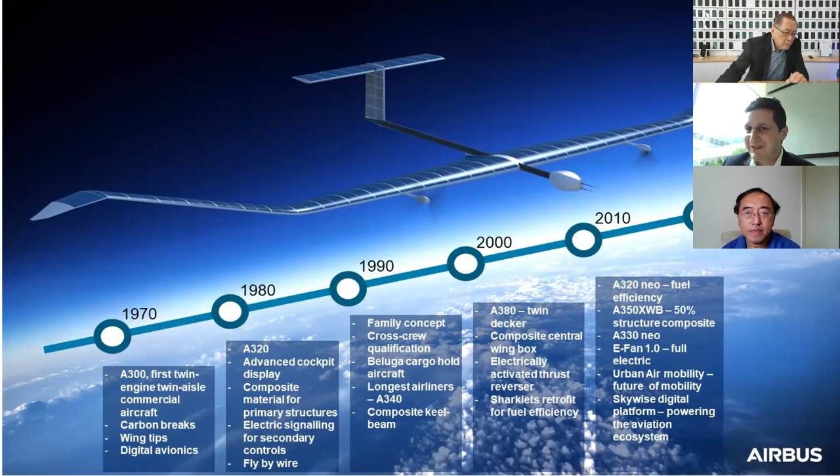Now, what I'm describing here is something that we have ourselves. We were in the driving seat, if you want. We develop technology and make sure that it goes on the plane slowly but surely, step by step. The world is accelerating. Everybody is talking about digital, we are more and more connected, and what was true before is less and less true. We are not always in the driving seat anymore, and sometimes we need to look outside of the aerospace ecosystem to understand where the new promising technologies are.

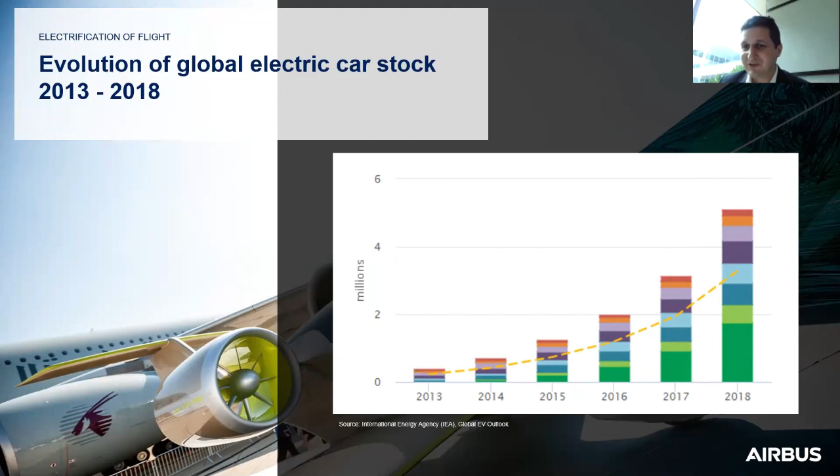For example, if you look at the evolution of the electrical car stock, this is exponential, right? This tells us that the technology at some point will reach a level of maturity and a cost per unit of energy stored that is going to be useful for aerospace. Similarly, and maybe even more important for the topic of today, I'm talking about hydrogen, the growth of renewable energy started from something that was barely noticeable 10, 20 years ago, and now this is exponential. I guess the growth of renewable electricity is an exponential thing.

And this is actually key when you're trying to do a zero emission type of aircraft, because if you're creating electricity somewhere, you're creating energy. If you want to create energy, there is no magic happening here. You need to input at least the same amount of energy, right? And if you input energy that is not from renewable sources, you're just creating CO2 upstream, and you didn't solve any problem. So this is very key in trying to achieve zero emission, is to make sure that if we use hydrogen, if we use electricity, it's been generated by renewable energy.

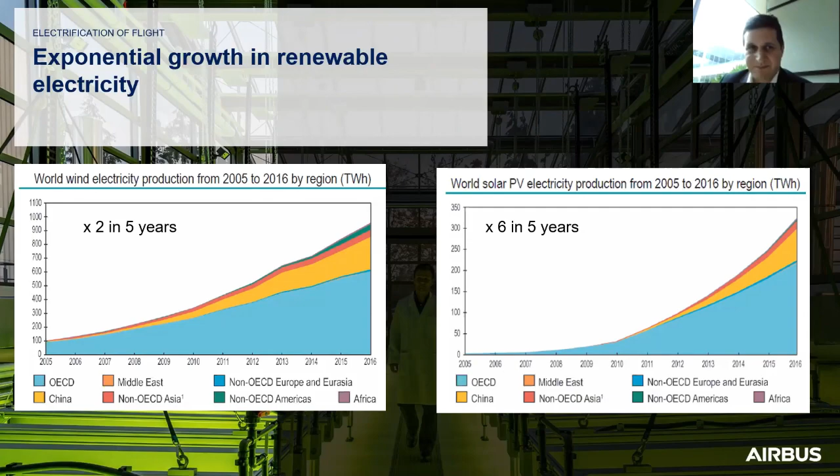So looking at this, we tried to jump on the wagon of electricity and more electrical and powered aircraft. And we did a demonstration almost 10 years ago, seven years ago. We actually made a very powerful statement by crossing the channel again, but this time with a fully electrically powered aircraft. This is what we call the E-Fan. It crossed the channel solely powered by electrical power. The purpose was to show that it was possible to get something in the air just with electrical power. So this is a great success.

It's a reenactment of a historical milestone, but there is still a very long way from a two-seater, like you can see on this image, all the way to an A320 with 100 plus passengers on board. So we created a roadmap to try to leverage this, to push as far as possible electrical powered systems.

And we have done a variety of different types of systems, and some of them will be very much in line with the domain of expertise of Professor Wang, I guess, because we have a bit of personal air vehicle, rotorcraft type of vehicle. We have demonstrators all the way to this City Airbus here, with 2 megawatt engines that are propelling this in the air. It's a pretty big bird, right? It's doable, but it's still very far from a 200-seater.

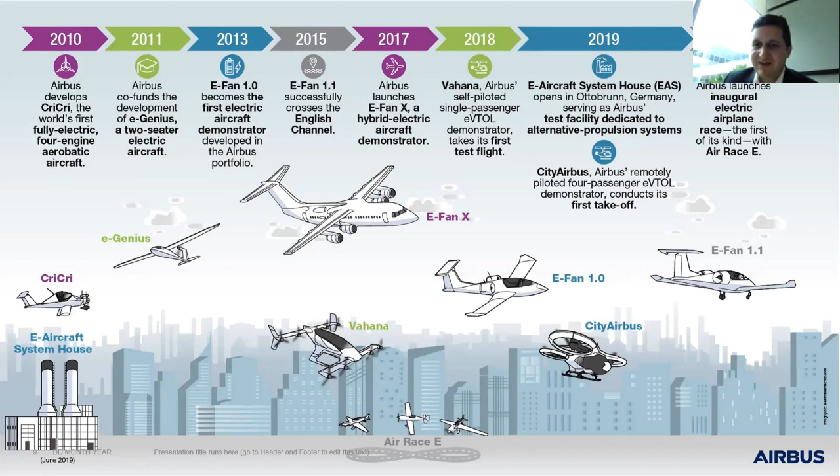In parallel, and I will go to hydrogen now, there is some limitation to batteries. We've always been investigating what if for alternative fuel like hydrogen. And Airbus ourselves, you know, we do airplanes, but we also do some rockets, right? We are sending rockets into space, and you know that these are fueled by liquid hydrogen. So we have a bit of experience in this field also, how to manage hydrogen. And 20 years ago, there were already some studies in Airbus on what if we could power aircraft by hydrogen. There are some questions, and I'm going to show a bit of this to you.

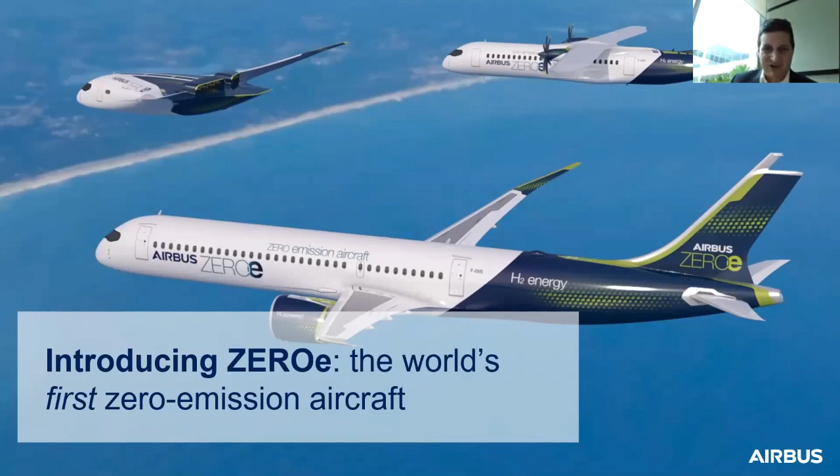So to the heart of the presentation now, introducing this concept that we are trying to push now, hydrogen-powered aircraft. We deem this program ZEROe, for zero emission. And we move to hydrogen as a natural choice somehow, because if you want to achieve zero emission, if you burn hydrogen, you're basically creating water, right?

And this is something that we can deal with. There is always a problem of where you're creating this water. Are you going to create more contrails, for example, if you produce this somehow too high in the atmosphere? So there are some trade-offs to be investigated, but it's a major step. It's a disruptive step compared to CO2 emission.

The cost of producing hydrogen is going to decline also a lot, and I'm talking about green hydrogen, right? And as of today, it's way more expensive, to face the reality. To produce hydrogen, 1 kilogram of hydrogen is going to be 4 or 5 times more expensive than the equivalent of kerosene, meaning that economically, we still have some progress to do on the ecosystem itself of producing hydrogen.

And then hydrogen itself is a very energy dense gas fuel. So it means that if you want to do a transatlantic flight from Paris to New York, you can reduce the weight of fuel that you're going to take. From 40 tons of fuel, you just need 10 tons of fuel, for example. So this is on the plus side.

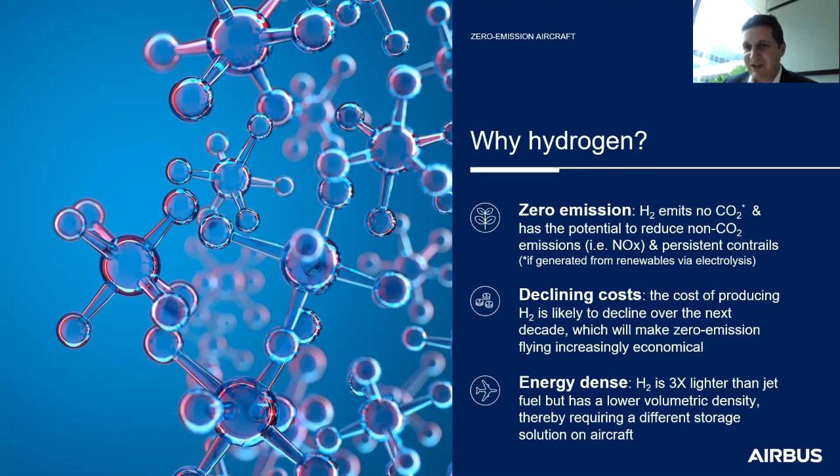On the minus side, it's more energy dense, but the volume is going to be way higher actually. So it means that it will have an impact on the design of the plane itself. You cannot just put hydrogen in the wing anymore, so you will have to think again on the design of the aircraft. I will come to this later.

Then how to use hydrogen. This is not where the main blocker is. Basically, it's not like we never got a plane to fly on hydrogen, right? This has happened in the past. We are putting rockets in space with hydrogen. We know how to do that.

You can combust hydrogen directly in the motor. This is the first type of technology. And if anything, this has only advantages because the combustion is going to be at a lower temperature. So it means that the engine will be more durable. There will be less maintenance. So it has only advantages. It's really doable, right?

There are 2 other types of technologies that we can consider. One, which is not really mature yet, is fuel cells. But again, this is not driven by aerospace. The ecosystem of fuel cells for cars, for example, is developing very fast. And you could imagine at the very least that in 10 years from now, a 2 megawatt hydrogen fuel cell would be available to replace the APU or to support the starting of the engine or something like that.

And then the third point, back to alternative fuels. You can actually use hydrogen the same way it's used as of today. There is already hydrogen production in the world, and it's more for the petrochemical industry to produce petrochemicals, right? But you can use hydrogen, combine it with CO2, and create a fuel that can be burned in existing planes as we are flying them today. So this could be a bridge between today, using normal fuel, all the way to 2050, where the worldwide fleet of airplanes could be replaced by hydrogen-powered airplanes.

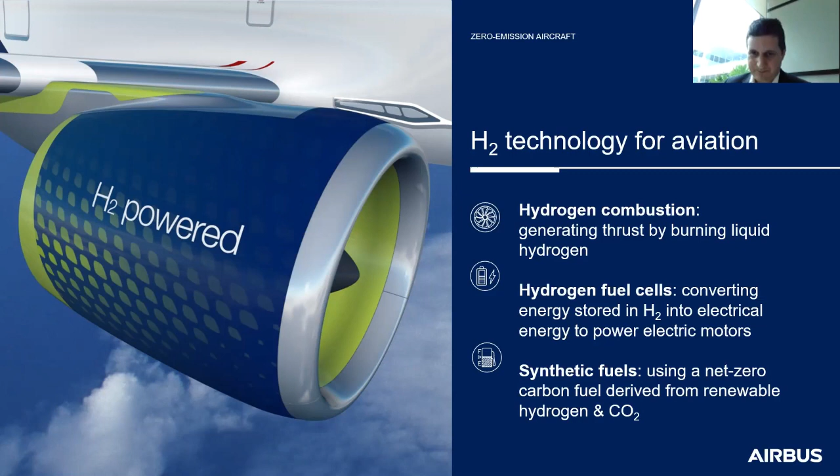Okay, so now the vision of Airbus. It's important to say here that these are concept planes. This is just to help focus the 10,000 engineers that you can find in Airbus and in the ecosystem and the supply chain, to help these people know what we have in mind.

And basically, what Airbus wants to do is put the hydrogen tank somewhere in the fuselage, right? I was mentioning earlier that hydrogen is very voluminous. You need to store it in more or less circular tanks. So it means it's not going to be in the wings anymore. The easiest is to put it in the fuselage, and you will put it here. So this will have some consequences on where the center of gravity of the plane is, and where you put the wings.

But basically, you see in our three concepts, hydrogen would be here, passengers would be here, and three different types of airplane. One replacing the A320, so 200 passengers, 2,000 nautical miles, taking you from Singapore all the way to Shanghai or to Perth, for example, and propulsion by hybrid hydrogen, right? A turbine burning hydrogen and maybe an electric motor to help the torque further.

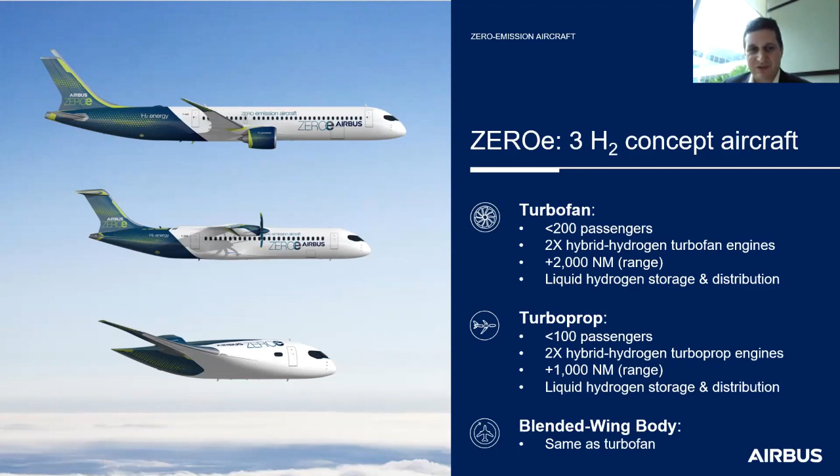Okay. All of this looks very nice, but there are some challenges, right? And the first one is technology compatibility. So basically, how can we produce hydrogen at the correct price? The plane will be bigger, right? So what kind of material are you going to use to build the plane?

Then, can we have the ecosystem for distribution of the hydrogen? What kind of infrastructure can be used? Can we reuse the current infrastructure? What are the regulations that need to be put in place? And what would be the acceptance in the public also?

In parallel, I was mentioning sustainable aviation fuel. This is not something that is dead now, right? It's not because we talk hydrogen that there is no future for sustainable aviation fuel. In particular, in bridging the time gap between today and 20 years from now, when there will be wider replacement of the existing fleet.

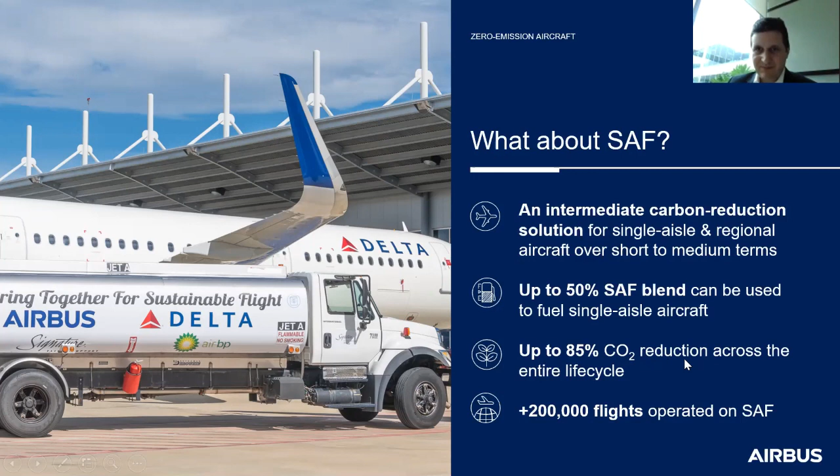And then very quickly, our path to creating this aircraft. I was saying the technologies, we are going to explore them in the next 2 to 5 years. Investigating the material, the configuration, creating prototypes and demonstrators so that we can collect enough information to go all the way through the certification process, right?

We need to look at all the aspects, not only the propulsion by hydrogen, but what is the impact on the climate, what kind of other emissions are going to be produced, how we can optimize, for example, the combustion so that not only we don't produce CO2, but we produce a very little amount of NOx. How we reduce the noise, how we integrate with existing infrastructure. What is the market also?

Because, you know, at Airbus, we are producing aircraft and products for our customers. So our customers will be able to take on the aircraft only if the price of hydrogen has reduced, or if the price of hydrogen has not reduced, what kind of incentives are in place, what is the market for it, the customer acceptance, and so on. So these are all hypotheses or questions that we need to answer in the next 5 years.

And to do this, again, this is the same message I was saying at the beginning. This is not something where we are in the driving seat and we decide everything. We need to collaborate with all the stakeholders and the wider ecosystem of the hydrogen producers, of the airports, of the infrastructure, of the regulations for hydrogen transport and storage.

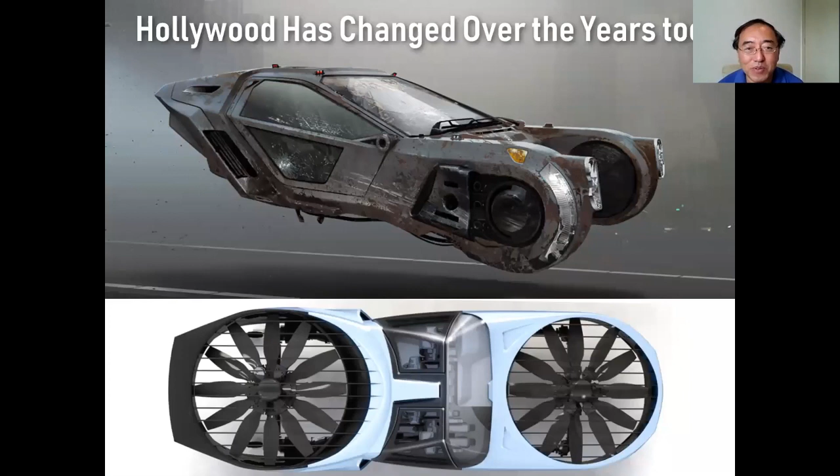So Hollywood is great. They came up with simple ideas 50 years ago, and now Hollywood has changed over the years too to come up with even more luminous and different types of thinking. So the dream is we could always fly from home to the office, between office and shopping, everything, have our personal air mobility. That has been our dream for many years. So let's talk about eVTOL, which stands for electric vertical takeoff and landing. How did it all begin?

Let's turn the clock back one decade ago, to 2010. From 2010 to 2020, there was a great rising of research into electric propulsion. Back in 2010, I had the idea, why don't we make electric eVTOL aircraft? Because for the last 30 years, I have been working in the helicopter industry at Sikorsky Aircraft and also at Agusta Westland helicopters. So I came up with the idea, let's design an all-electric vertical takeoff machine. This was the aircraft I designed at Agusta Westland back in 2010. And we flew it.

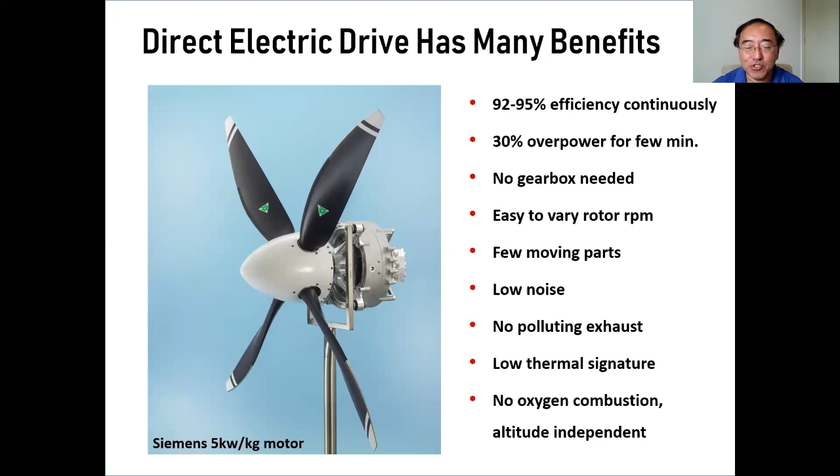And there are many benefits to this. For example, the electric motor can get 92 to 95% efficiency continuously, while engines only have a thermal efficiency around 25%. You can even overpower, meaning put in more current, and get an extra 30% power for a few minutes until the temperature is too high. You don't need a gearbox, transmission, or drivetrain. The motor can be directly coupled to the propeller, so it's very easy to vary the RPM, with few moving parts. There are only 2 ball bearings supporting the rotor shaft, very low noise, no polluting exhaust, low thermal signature, and you don't need oxygen for combustion. Therefore, it's altitude independent.

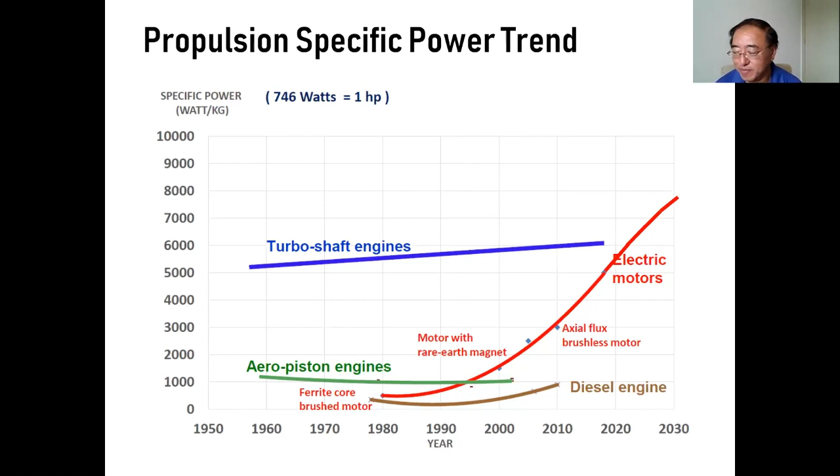As we can see, it had quantum improvement over the last 40, 50 years. From 2020 to 2030, we can probably expect the specific power of the electric motor to even exceed the turbine engine. So there's a future for electric flight.

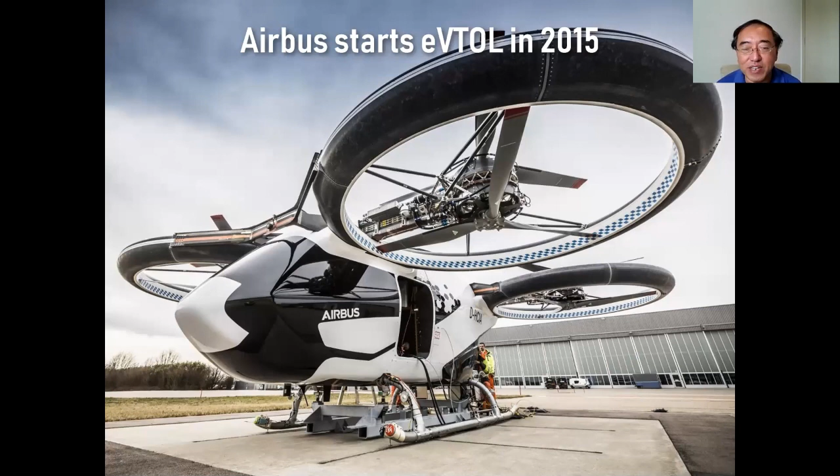So now today, 2018, 19, 2020, we see a huge rise in the number of media reports on electric VTOL and urban air mobility. This shows there's a great interest. Let's take a look. 2015, Airbus started eVTOL aircraft. So they also realized this is going to be the big one. 2018, Bell Helicopter in the US also started launching their own program.

2019, Boeing also started. First, they purchased Aurora Flight Sciences, and now they collaborate with Google and Porsche to work on their own version. So now all the big OEMs just started in the last few years to get into eVTOL. So from 2010, the Project Zero time, up to 2019, there have been over about 200 designs of these eVTOL aircraft.

The number of startups and OEMs working on them has grown exponentially. In 2015, there was only less than a handful, under 10 companies working on them. Today, 2020, we can see over 300 groups working on electric VTOL aircraft. This is a great time for aerospace engineers again. We can dream and build aircraft, and it allows all the newly graduated engineers to find a place to work on them.

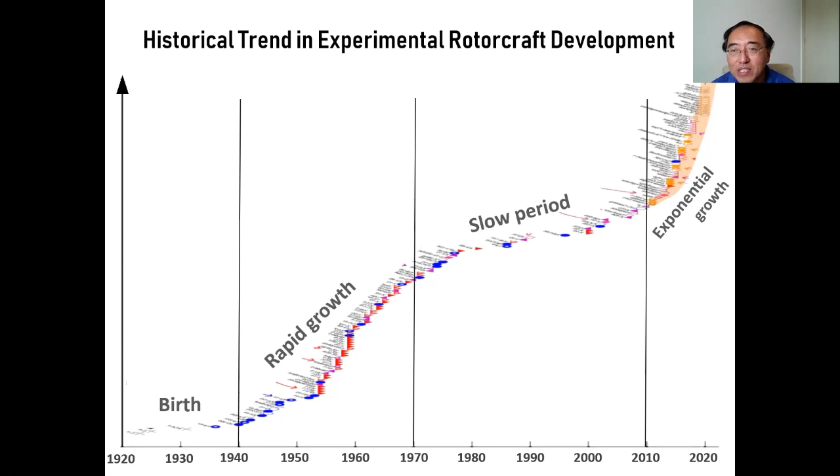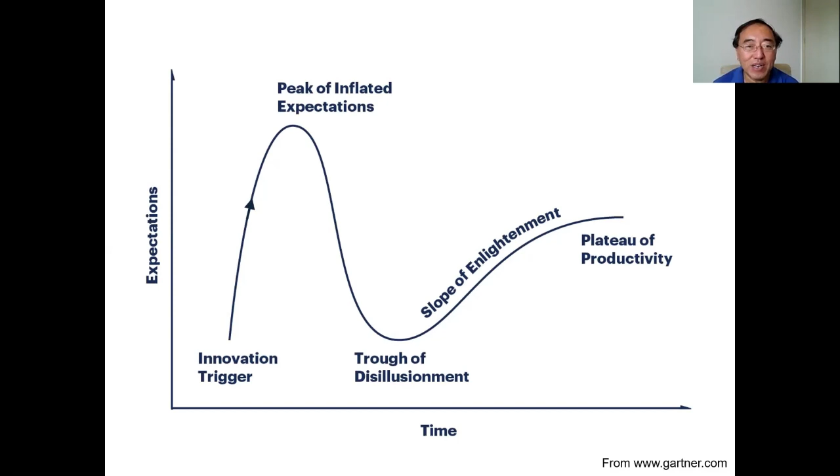So where are we currently in eVTOL? We are right now still around here on the rising stage. That's why there are 300 companies working on this. Then probably we can see up to 400 even. Eventually, 90% of these 400 companies will not survive. That is when it goes to the trough.

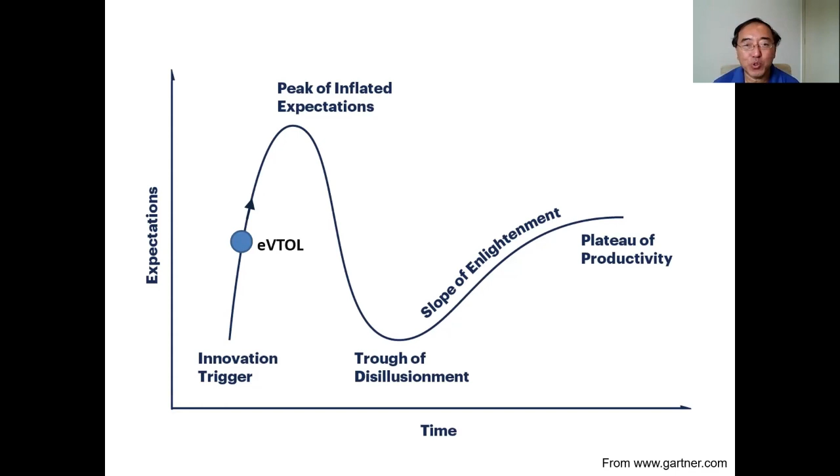And then what will come out is probably 20 companies with good top 20 designs. So the majority of startups will not survive. Because why? Not enough experienced eVTOL designers in the world, and not enough capital to support 300 teams worldwide. There's only a handful of helicopter and rotorcraft eVTOL designers in the world, not enough to sustain the 300.

Even though today there is about $2 billion of funding put into it, it won't support 300. So the ecosystem eventually can support 15 to 20 eVTOL companies and many supplier associate businesses. And Morgan Stanley has forecast this market will be at least US $1.5 trillion by 2040.

So now let's go into a little more technical. We often hear the words energy density and specific energy. They're not the same. For eVTOL, the useful measurement for a battery is specific energy. We want to improve the specific energy. So what is specific energy? Specific energy is the energy per unit mass of a fuel or battery. It's measured either in megajoules per kilogram or watt-hours per kilogram. That's why it's called specific energy, specific mass.

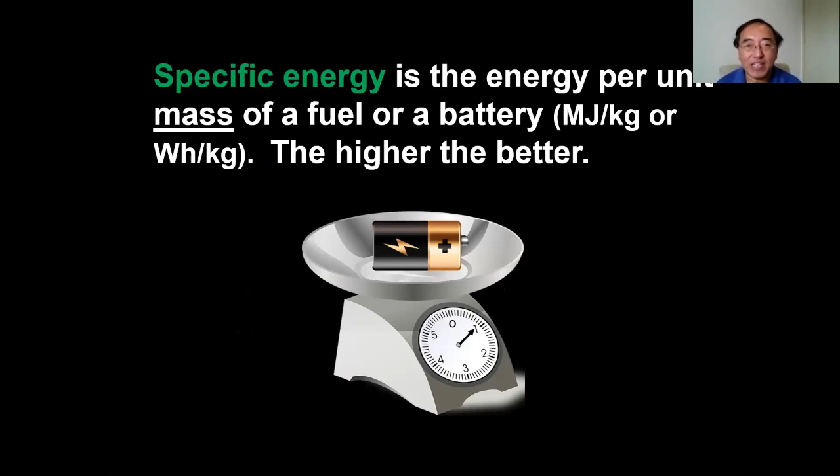And of course, the higher the number, the better. Let's take a look at some of the specific energy numbers. Diesel fuel, quite good, that's 12,000 watt-hours per kilogram. Burning coal, you'll get 7,500 watt-hours per kilogram. Even burning wood, you get 4,000 watt-hours per kilogram. Propane gas, excellent, 13,000 watt-hours per kilogram.

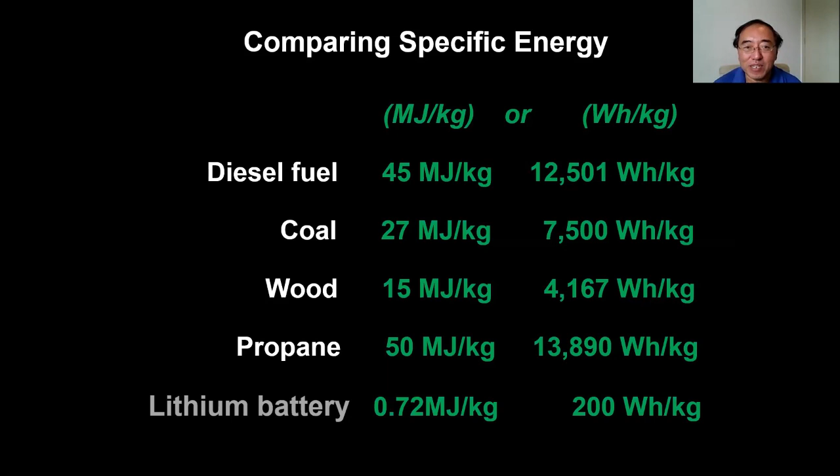So energy density. Before I talked about specific energy, now what is energy density? Energy density is the energy per unit of volume for a fuel or battery. It's measured as megajoules per cubic meter, and the higher the number the better. So how much energy we can put in a 1 meter box. So it's different than specific energy, how much energy per weight.

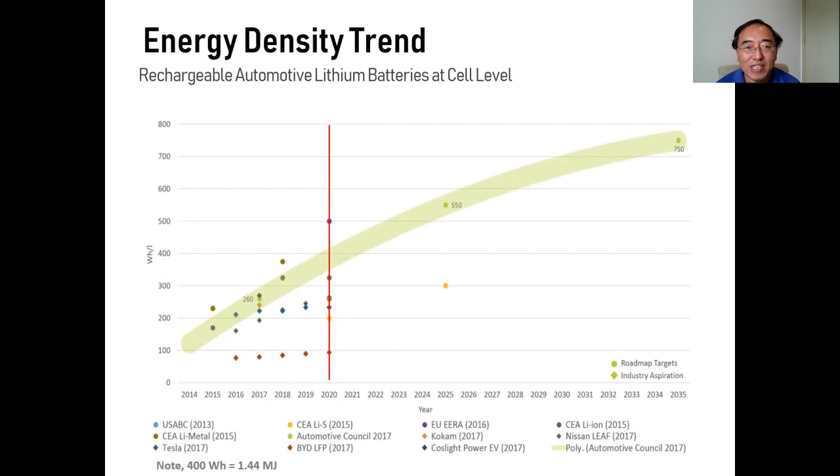So here is a trend showing the energy density over the years. In the last decade, we can see we're rising: in 2014 we had only about 100 watt-hours per liter, and now in 2020 we improved to about 400 watt-hours per liter. It's measured by volume. And in the future, we can expect lithium batteries to go up to about 750 by 2035. It's almost double, but still not a quantum jump.

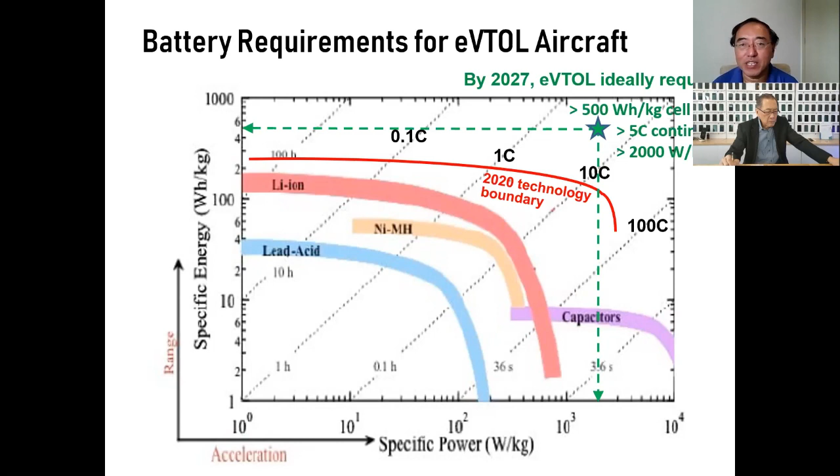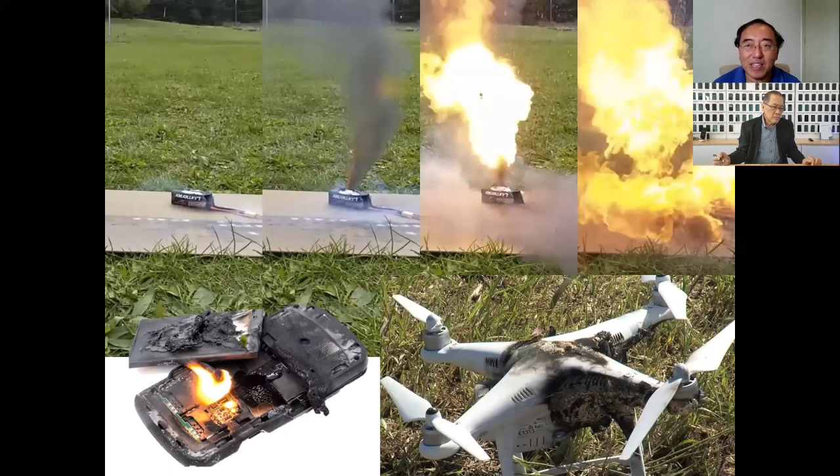Battery, lithium type, could be very dangerous. They can catch fire spontaneously. This is what happens when the lithium battery goes on fire. We have seen news that Tesla cars, when they have an accident, it goes on fire and you couldn't put it out. So there still needs to be a way we don't have yet, how to contain the lithium fire once it started. And the best, how do we prevent them from happening?

Lithium is very volatile. So right now there's a global race around the world to certify eVTOL aircraft. Every country wants to be the first one. Back in 2017, the United States, the FAA, already started modifying their Part 23. In 2018, the UK also started working on it. They granted a company in Bristol called Vertical Aerospace the flight test permission. Then in 2019, China, CAAC, also issued guidance on UAV, unmanned aircraft. In 2019, EHang, a Chinese company, received the authorization from CAAC to start testing.

Now, you keep looking to the right, farther right, and farther right. By 2024, Paris wants to beat the rest of the world to be the first one to have an electric VTOL aircraft flying and working in Europe, in order to demonstrate during the Olympic time. So the Europeans are working extremely hard also to compete against the rest of the world.

Today, there are over 50 cities. They want to explore urban air mobility for carrying people and cargo. Los Angeles, Dallas, Melbourne, Dubai, Rio de Janeiro, even Singapore — we want to launch urban air mobility, electric vertical takeoff aircraft, by 2025. In Paris, 2024. It's a global race. This is the curve. It shows what is going to likely happen.

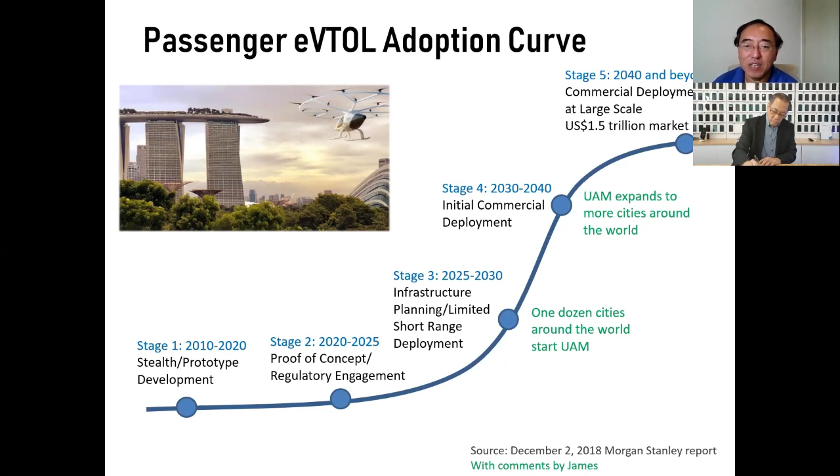2030 to 2040, we can expect urban air mobility to expand to about 100 cities around the world. And 2040 and beyond, we'll see large-scale deployment of eVTOL and urban air mobility. So now let's take a look at 2030 to 2040, the future.

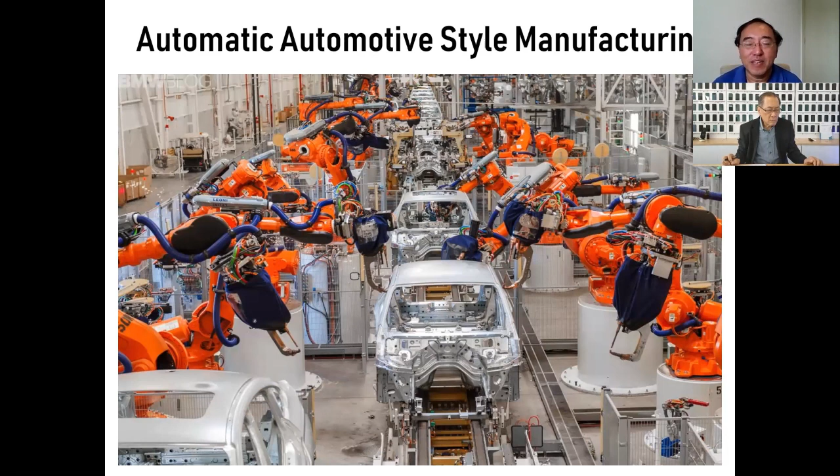We will need millions of them, lots of them. The old-fashioned way of manufacturing helicopters in small quantity is not viable anymore, because right now these companies only produce about 200 helicopters per year. In the future, we must be able to manufacture them in robotic style, autonomously, just like producing cars - make them cheaper, faster, quicker, and more of them.

That is why the huge future demand for eVTOL already got the automotive industry interested. Today, Toyota, Hyundai, Mercedes, Audi, Geely in Shanghai, even Google, Intel, and Airbus, Boeing, they all want a piece of this electric vertical takeoff urban air mobility market. No one wants to be left behind like Kodak.

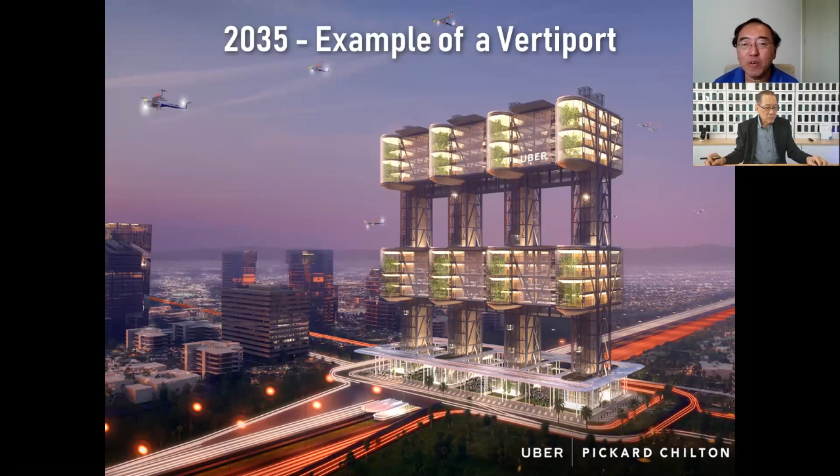This probably won't happen until 2035 at this large scale. In the beginning, 2025, we'll probably see very small vertiports, just only allowing 1 or 2 aircraft to take off and land simultaneously. So by 2035, what can we expect?

This is the vision actually proposed by Uber: 1,000 landings per hour, 1,000 takeoffs per hour, each one carrying 5 passengers, all autonomous, no pilot. That means every hour there are 10,000 passengers on only a 3-acre lot. That's a very, very high throughput.

How can you achieve that? So you'll have one eVTOL coming in on the left, come to the landing pad, they'll unload the passengers just like a Disneyland ride, and then quickly load up the new passengers and take off again. All this must be done within a 6-minute period - landing, unloading, loading, and taking off. During the 6 minutes, they also give a quick zap, a quick charge of the battery.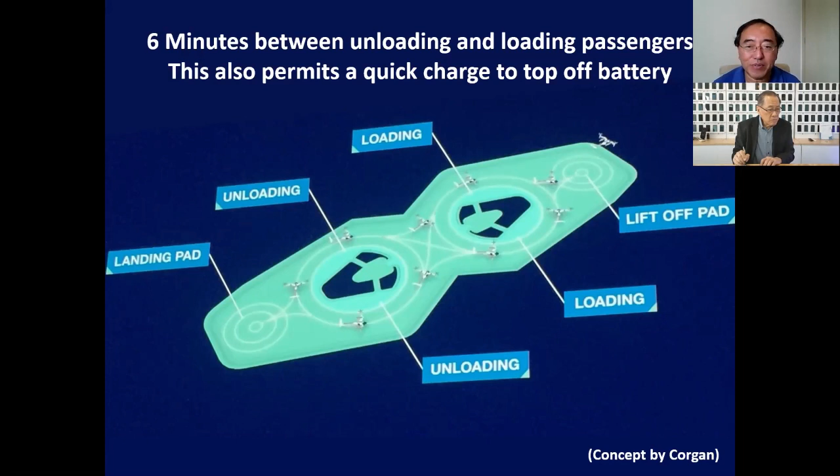So this is my last slide. Let me explain how this quick charge, 6-minute scenario works. Let's take a look at the right.

So basically for each mission, you'll be able to take off, hover for 1 minute, cruise for about 10 minutes to your next vertiport - for example, it could be from Jurong East in Singapore all the way to Changi Airport, that's only a less than 10-minute cruise. You'll land in 1 minute, and then once you land they will plug in, charge the battery for 6 minutes, and unplug. That's how it works. In Singapore, maybe we can set up 10 different locations - at Changi Airport, Jurong, Woodlands, Sentosa Island. That's how this urban air mobility works.

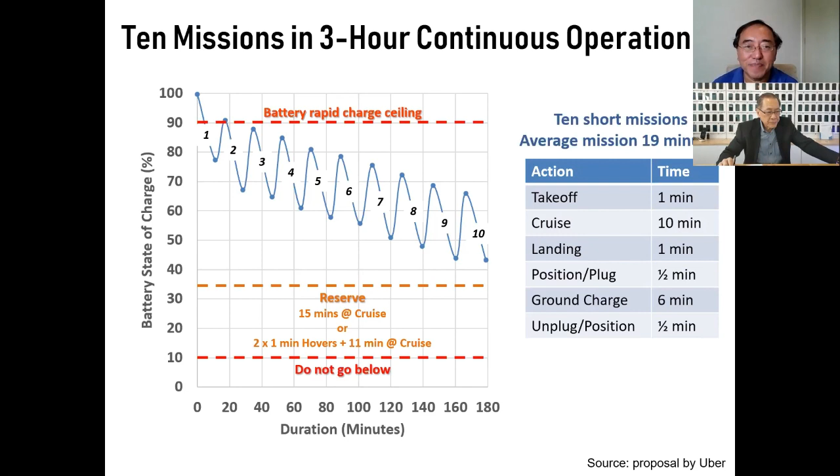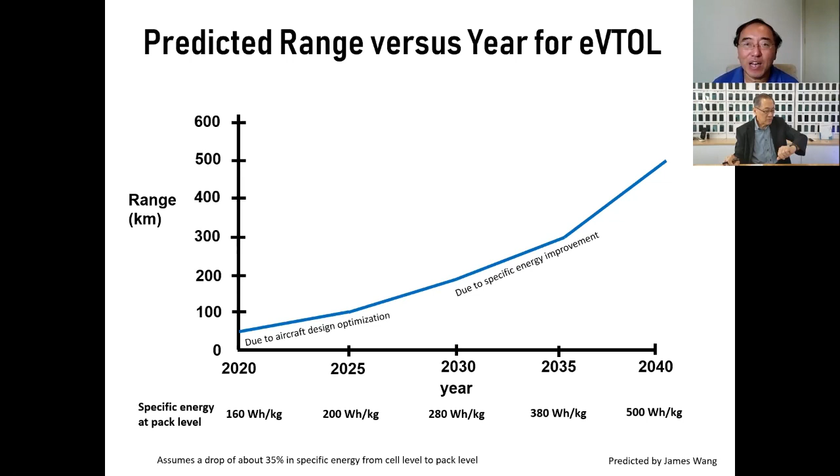Now, 500 kilometer range is pretty good. We can pretty much fly from here to Singapore. So this could be the future - we look up at the sky and we will see lots of eVTOL flying.